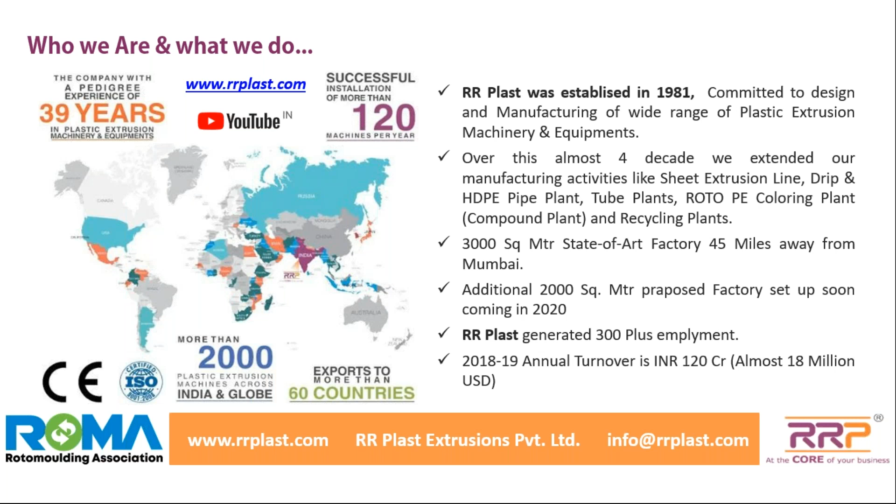We have clients across the world. Being it was a show for domestic market, we are not covering the international market. So this is a small introduction about my company.

Now, what is our today's agenda? I am taking you on a quality journey of rotomolding manufacturing. Now, most of the people which I can see are from the rotomolding industry, so they know the basic subject. But still, to start the subject, let us understand what is rotomolding.

Selection of a right granule of right MFI according to the application, making a right compound where you want to add additives, where you want to add colors, making it pulverize as much as fine as you can, and then from this powder you make a finished product from rotomolding, where you fill your powder into the mold, you heat the material while the mold is rotating, then you give sufficient time for cooling the product, and the product comes out from the tank mold. So this is a very basic process.

We are not going to touch the second and third process, which is pulverizing and the rotomolding unit. I am going to cover only this first part, which is related to extrusion.

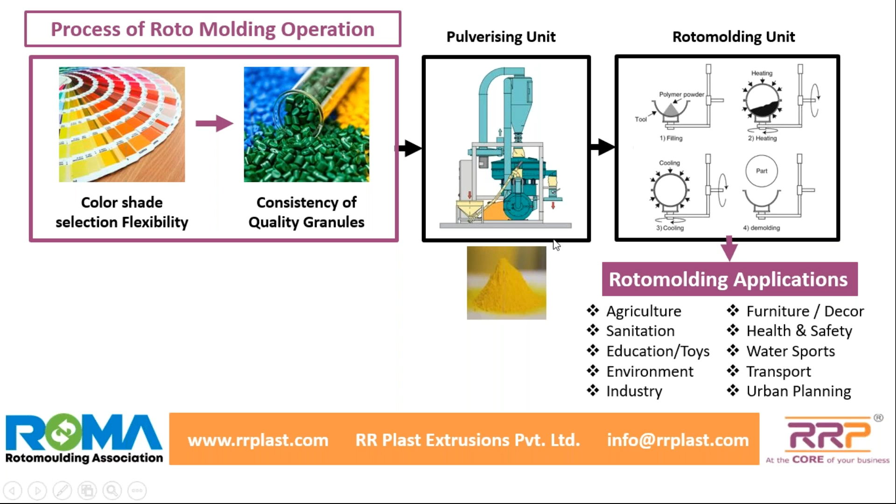Now, rotomolding industry is not just a tank manufacturer. They are evolving themselves to serve different sectors across the world for different applications, whether you say road barriers, playing toys, dustbins, chemical tanks, safety tanks, different applications, still more to come.

And I am sure most of the processors are looking for these technical products for their future expansions, where once you start thinking about these products, then you start thinking about the technical capability of processing the right polymer in the right way and molding it in the correct way.

See, some of our clients, I have taken this information from our clients only from India. See, we are not only a tank manufacturer. We are giving support to the railway industry for carrying materials, supporting our soldiers, farmers for the milk, safety for our family. So we are everywhere. Rotomolding is trying to give and serve to each and every industry.

So when we are trying to do this thing, we need to be very, very sure and accurate about what polymer we are selecting, how we are processing it. And that point I am going to cover in my presentation.

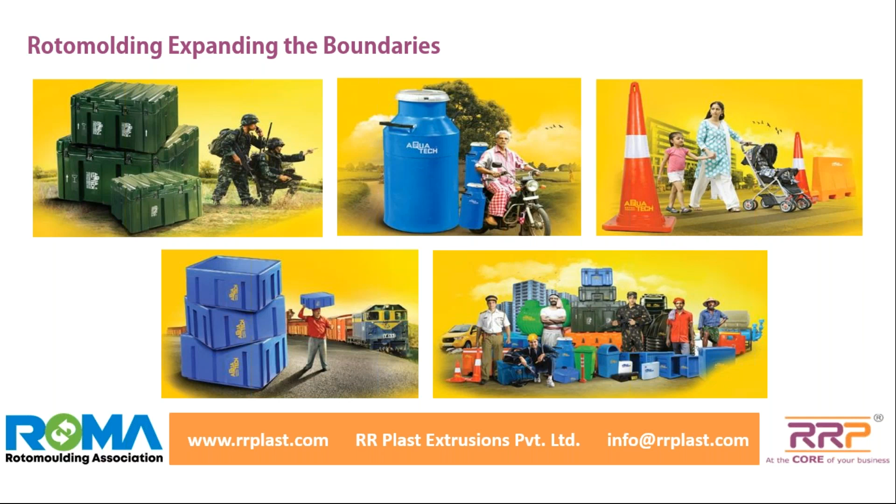Now, when we think about a roto compounding extrusion plant, what should a processor expect from this machine? He should ask the supplier, or ask himself, what does my industry require.

First question: higher dispersion of color pigment. Second: better melting of polymer without degradation and without changing the basic mechanical properties. Less exposure of material to heat. Homogenized polymer melting with the help of the right screw, which is the heart of the extrusion.

And the most important point: how much electricity or power I can save. Like countries in Africa, where most industries run on generators, or countries like India, where electricity cost is very high, this should definitely be a goal. Then, as the cost of production keeps increasing day by day, we must have machines with less manpower dependability. And last, consistent granule size.

Does the extruder or the compounding plant which you have deliver on all these points? I am trying to answer these questions during my presentation, so we can understand each and everything. Then I will come back to this slide to check whether the machine we are going to see is delivering all these points in terms of performance.

Now, before we go to the technical things, let me introduce the different models we are offering for this roto compounding. Generally, we have seen spaghetti, noodle, or strand pelletizing machines, which are generally available across the world and used by every processor.

During this process, there are some challenges faced by customers. We have come up with a new model, a die face cutting system, where you can see the complete layout I have shown you. I will explain the process in the next slide. This is the machine layout, and these are the models.

Now, where we are focusing, you can see in these charts, each and every model delivers output, whether it's a 45mm screw with 200 kilo output, or a 120mm screw with 1200 kilo output. The power consumption remains the same, which we commit to our customers: 0.18 kWh per kg, meaning unit per kg. This is always our goal when we design the machine and deliver the performance.

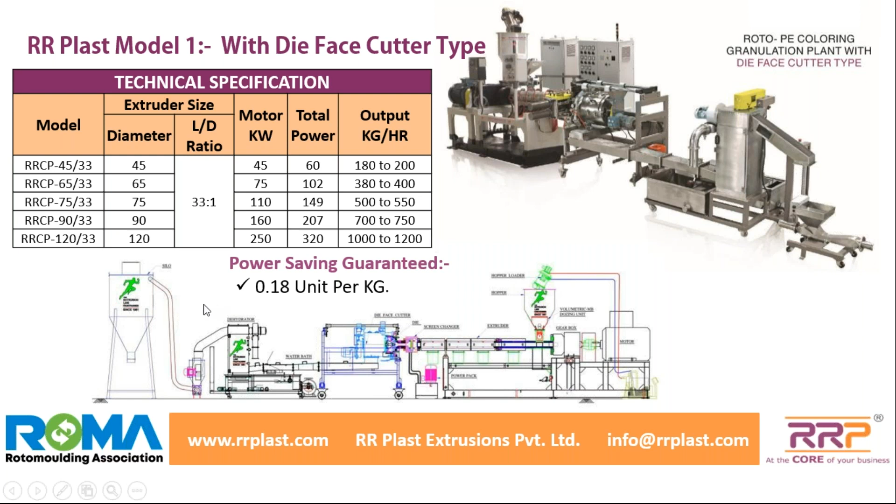Now I'll take you through a brief flow chart of this process. Let us understand how a general machine performs. Most extruders try to mix the material manually. You need a roto polymer, LLDPE, then you need color master batch, and sometimes additives to enhance the properties of the polymer, but these are physically mixed blends which go into the extruder. To this date, I see a lot of people depending on the manual process of this operation.

I'd like to draw attention to this point. Everybody should now consider whether they can use a right doser, a gravimetric system, which can take your virgin granule, color master batch, additive 1, additive 2, and dose very accurately into the extruder, so that each and every granule coming out from your extrusion line has the same properties, because it is correctly blended in correct proportion and percentage.

Those who cannot afford the gravimetric system, considering the investment cost, can at least go for the auto hopper loading system and volumetric master batch dosing, so you can be assured that during processing, your master batch dosing is not varying, so the dispersion of your master batch, or color, is absolutely consistent in each and every granule, so your product appears in the right manner when you represent it to the market.

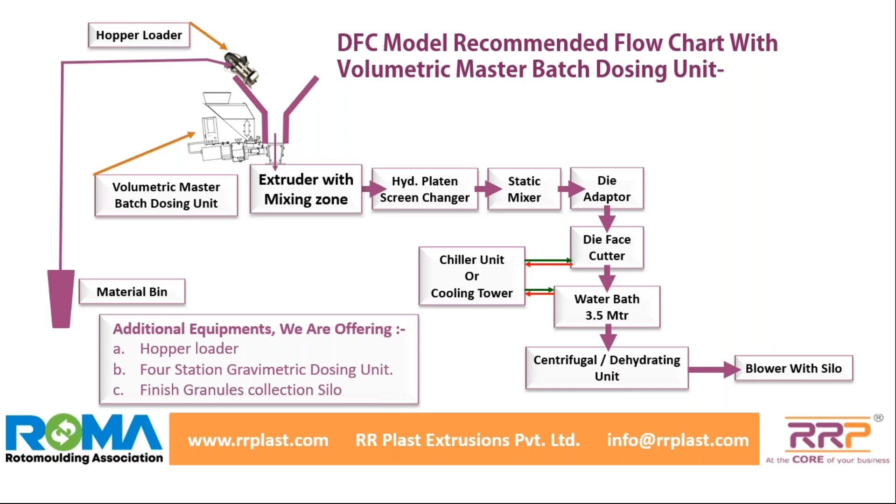Now, before we go to each and every segment of this flow chart - extruder, screen changer, static mixer, cutting systems - I would like to draw a little attention to a running video of our product.

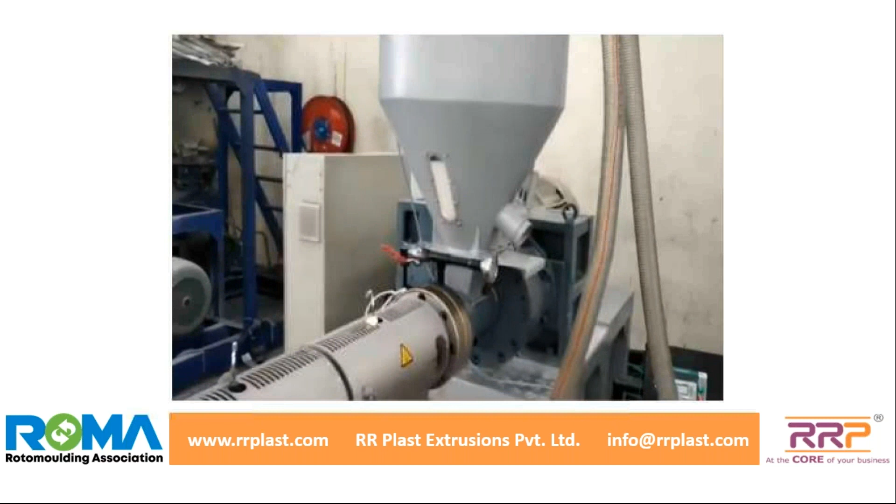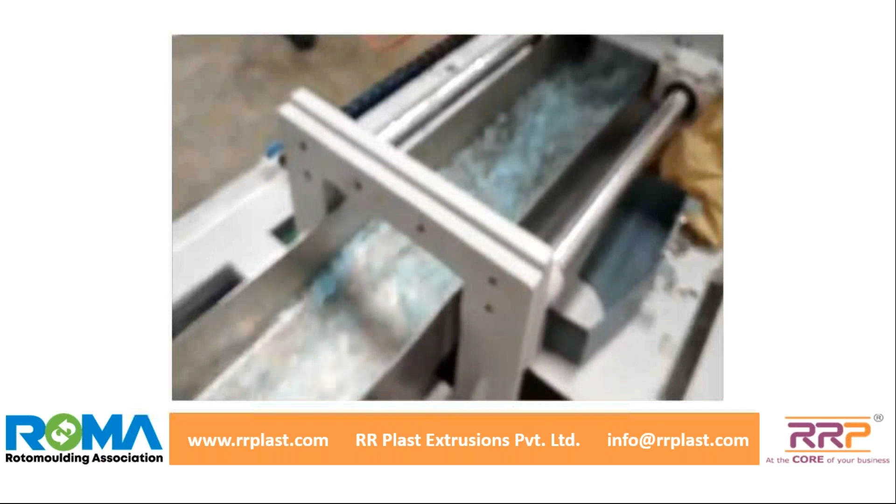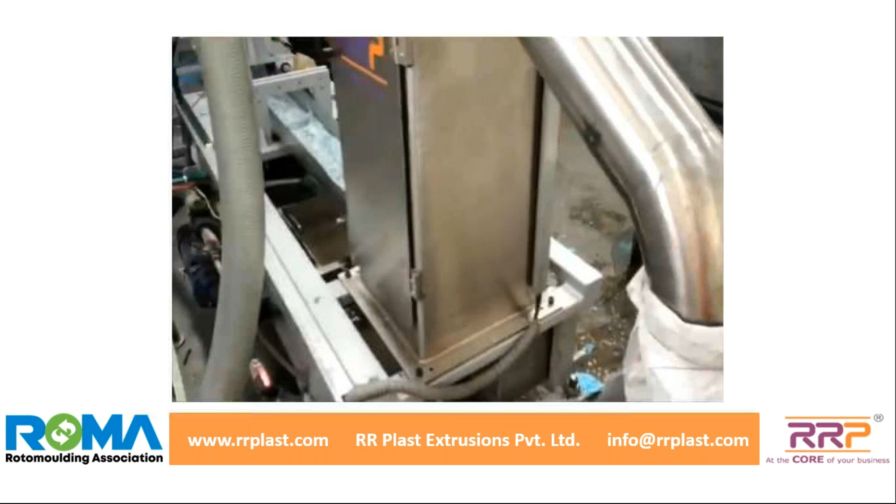See, this is the granule which is sucked by the loader. You can put a doser on the extruder, a die face cutting system. Now it has become a closed communication. The material is sucked by the loader and the granule is in your bag. Now this operation becomes a complete closed loop operation - no human being touches it, less area consumed. The die face cutter system we will discuss later on in more detail.

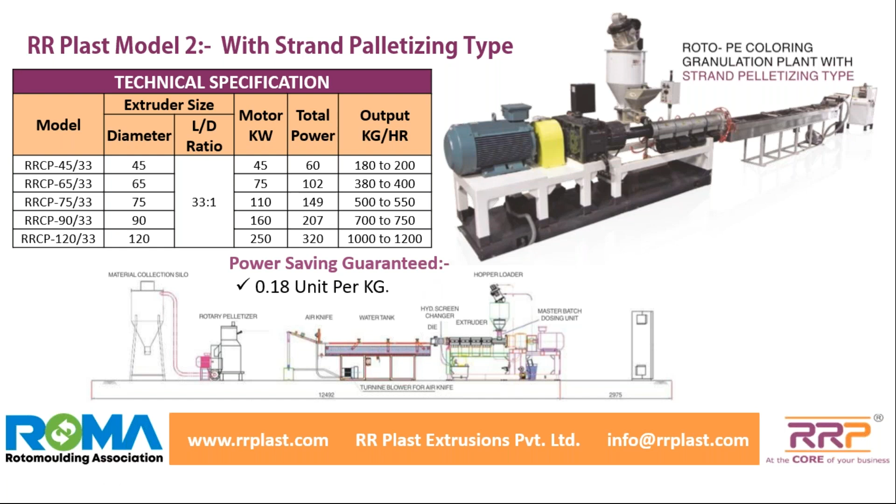I'll take a small video of this strand pelletizing. Okay sorry, before that, we will go to the process.

Same thing - you can have a proper mixing element, whether it's a gravimetric or volumetric doser, or hopper loader. After correct mixing, it will pass through the extruder, filtration through the screen changer, static mixer for better melting, multi-strand die, water tank, air knife, rotary pelletizing, and collection of the material.

So this is a complete setup. To run this machine, you need water, which can come from a cooling tower or chilling plant, depending on the capacity of the machine and the atmospheric temperature where we are going to run this machine.

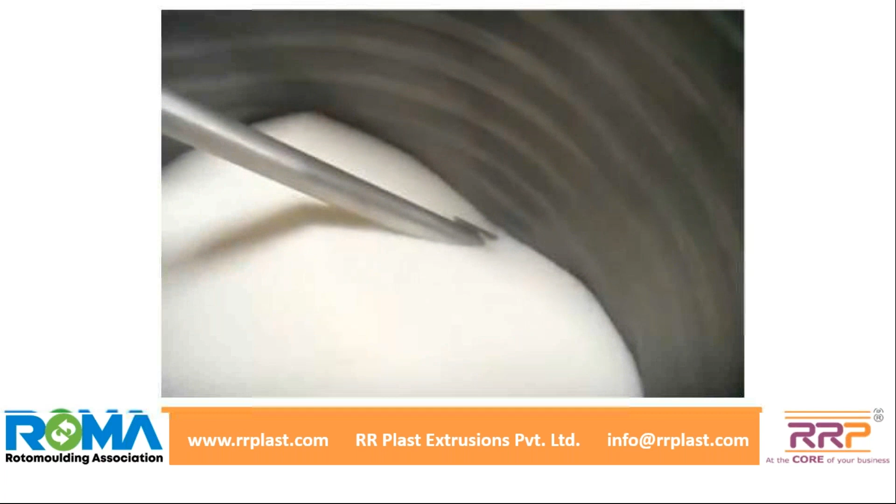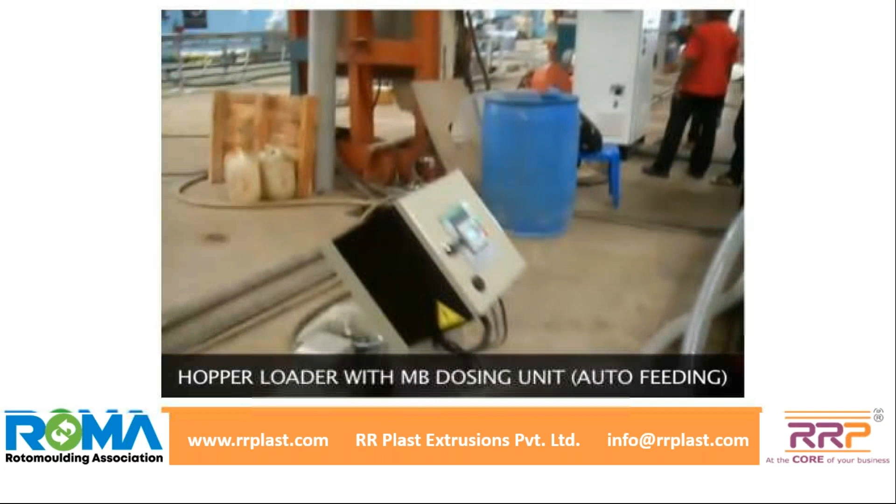This is another small video. These are the videos taken on our shop floor while doing the trial testing of the machines. We do a practical trial at rated capacity for multiple hours in our factory itself.

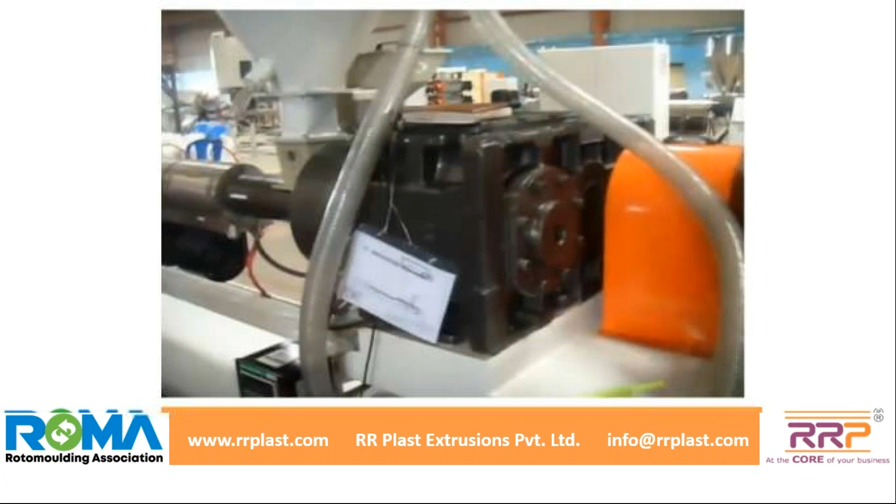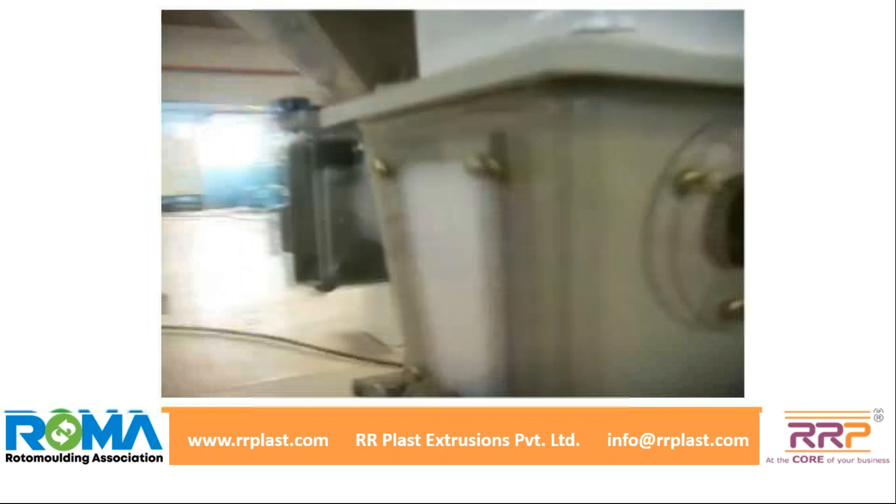You can see the direct couple motor to reduce friction between the belts, better energy transmission, volumetric doser for master batch - you can set it on the HMI, a barrier groove feed screw design. This is the doser which is dosing the master batch into the polymer.

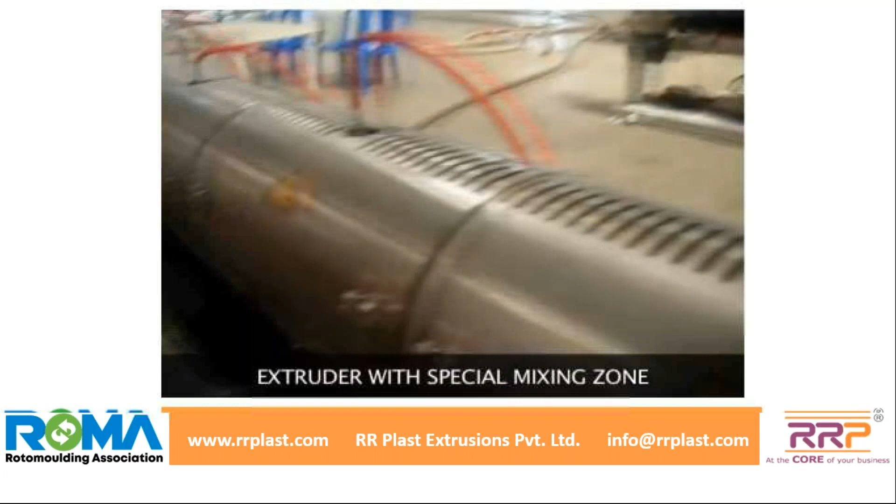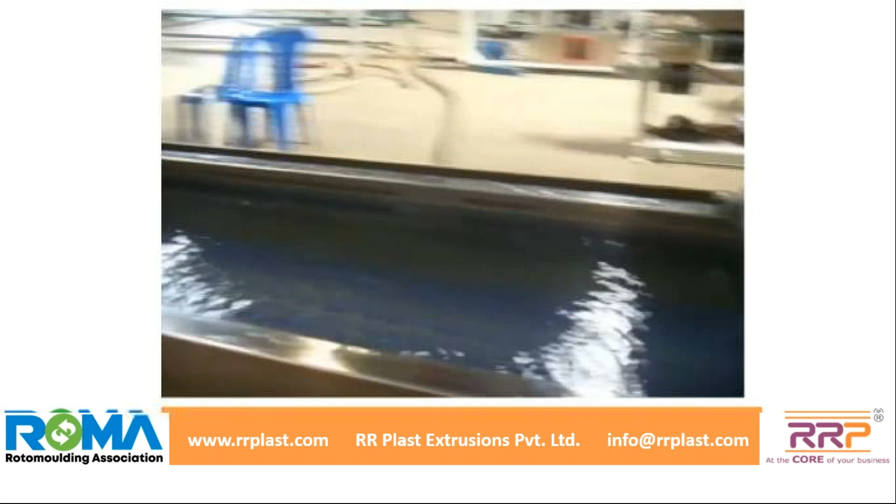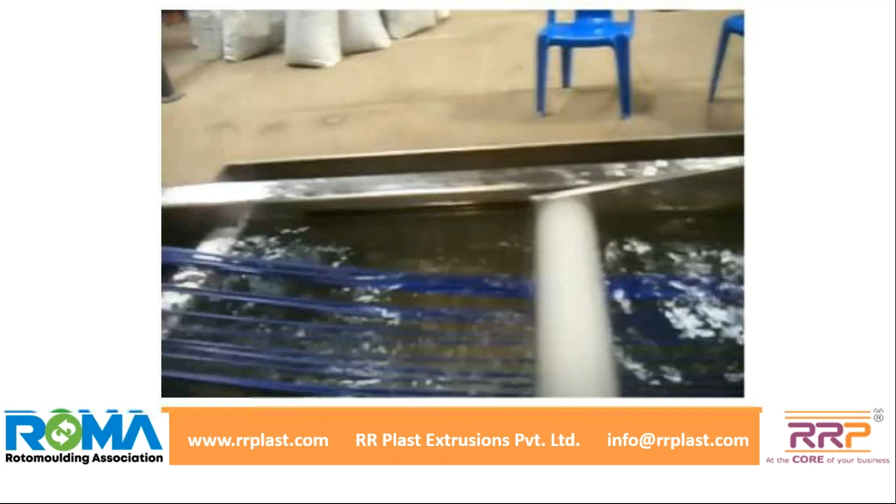Extruder, strand die, or you can say spaghetti die, cooling water bath, air knife to remove the additional water from the strands, and the strand pelletizer.

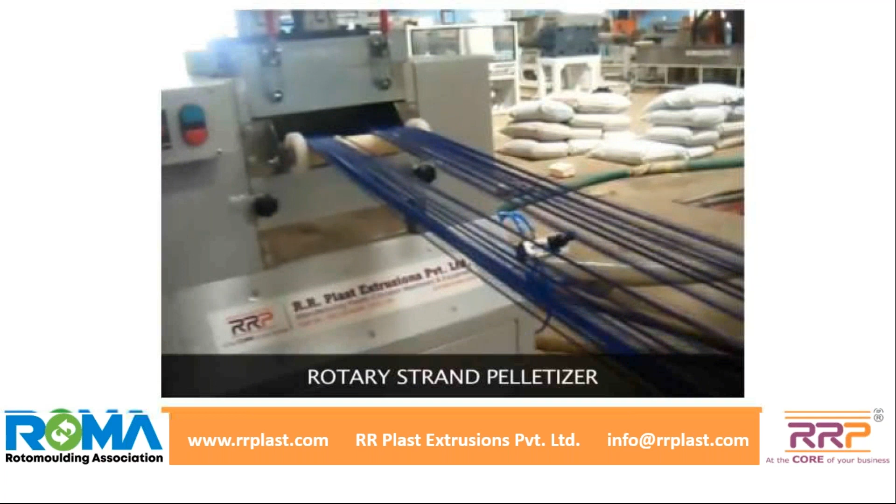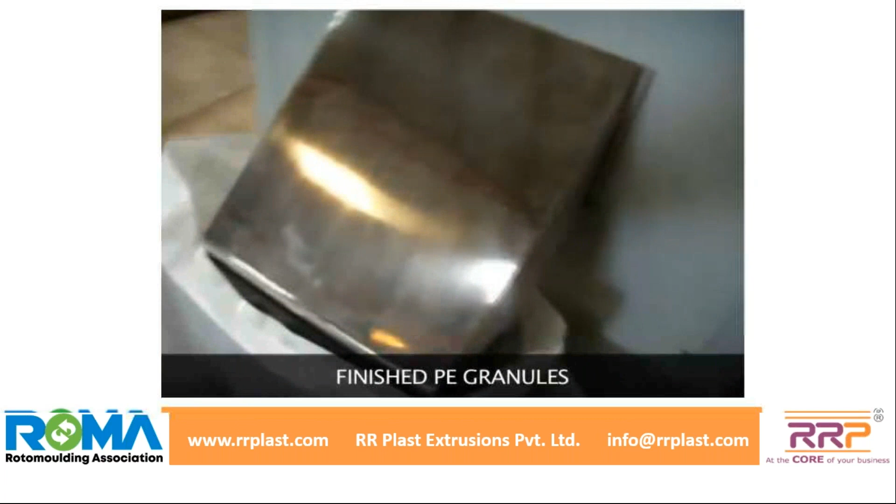So the flowchart we have seen, we have tried to cover in this machine. Maybe not all the components are available on the machine - this depends on the choice of the customer.

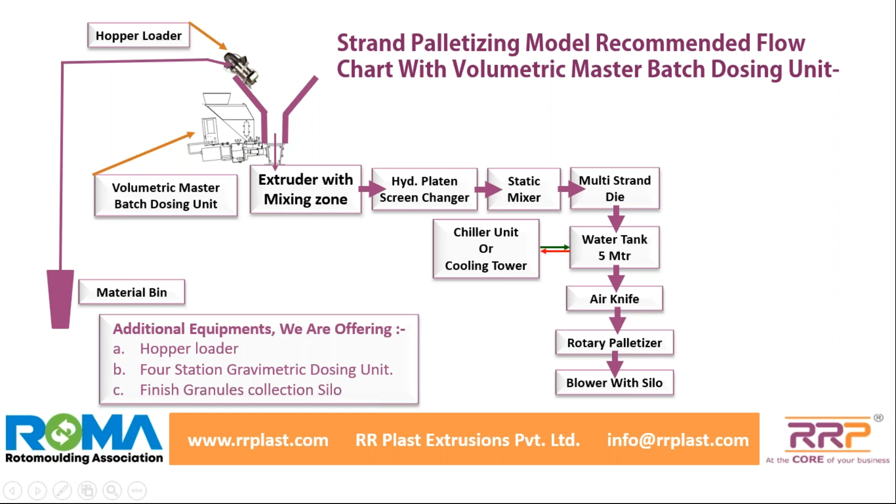Next, okay. Now, when we discuss the complete extrusion line, let us start with the first thing - the raw material and mixing with the right additives and polymer. What components can we use in this?

First, let us start - we don't depend on manpower. Anybody can select a hopper loader, which is available in your factory, or you can ask the machine supplier. So the loading becomes a constant feeding to the extruder.

Then the basic element one can select is the volumetric master batch doser. Why do you need this doser? Economical feeding of colors and additives. Precise metering reduces the color cost. This is a very important factor.

Say I want to add 5% of the color master batch, and while doing physical mixing manually, if a person does 4% or 6% instead, it will deteriorate the quality of the granule, as well as impact your manufacturing cost. Digital set point accuracy lets you set the product very accurately, reducing manpower - you don't require manpower to control this mixing. There's less material spillage because the system becomes automatic, and the perfect mixing ratio gives you color shade and quality consistency.

Now this is a very important part when we think about the tank and the product which is going to be used on external applications, where they are going to be exposed to UV sun rays. If your color dispersion is better, if your dosing of the master batch is perfect, then each and every product made on the roto molding has a consistent quality in terms of color shade, and your product life will get enhanced properly, as well as the appearance of the product always looks the same. Whether you have 50 products in your stacking, you can see the same product by use of this system.

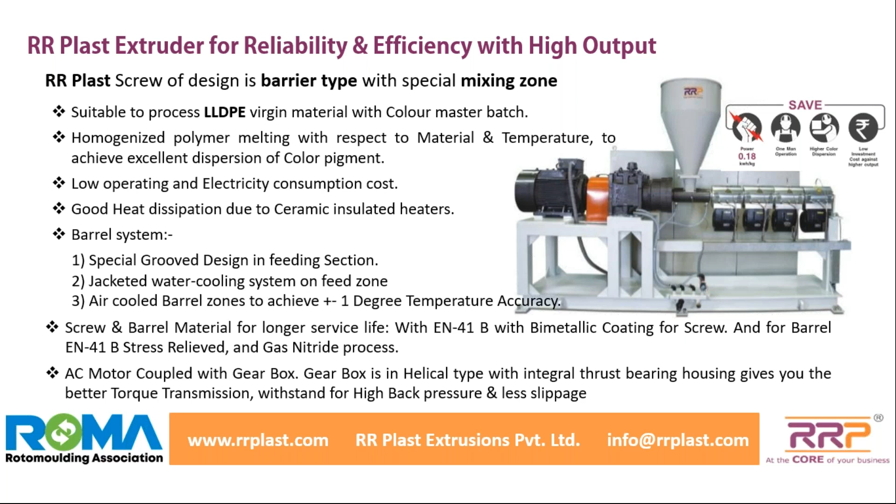If you can see this, the AC motor is directly coupled with the gearbox. For this particular model, we are specially offering this technology so that we try to reduce the transmission losses of using pulleys and belts, so that power consumption becomes low and machine maintenance becomes very low.

Now, when I was talking about different slides, everywhere I used the words low power consumption, better melting, homogenizing, and higher dispersion. Till now I just talked about these words. I did not explain how we can achieve it, how one can achieve it.

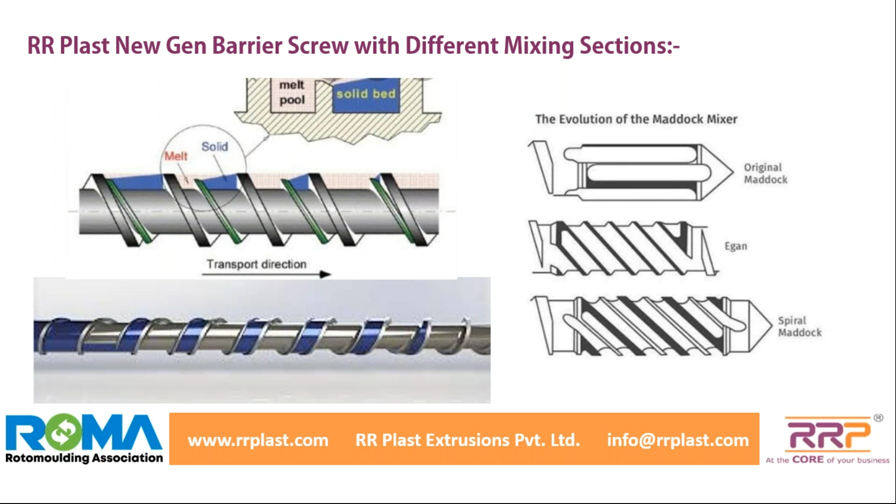Now, before we reach 100% melting, there is another element coming after the extruder, which is the screen changer.

A lot of people ask me the question: sir, I'm going to use virgin LLDPE, which is about 4.5 MFI, and I'm going to add only master batch or additives. So why do I require filtration?

You require filtration. First of all, every single screw by default has a breaker plate, and the screen changer also has a breaker plate. What is the use of a breaker plate? The breaker plate will first break the laminar flow of your material which is coming from the screw, because the screw is rotating, and the material coming from the screw is already in laminar flow, which gets broken in the screen changer.

Second thing, because of the breaker plate, you are using some mesh like 40, 60, or 80 mesh, creating a back pressure. This helps push the material at a constant pressure into the die, so that the strands coming from the die have constant pressure and constant size.

Now, even a person using virgin material and a master batch, after certain hours of operation—say 24, 48, or 72 hours—some degradation is going to happen, because of the colors in the master batch, maybe unmelted polymer coming with the virgin granules, or maybe some physical contamination during handling of the raw material. All these points get checked and filtered in the screen changer.

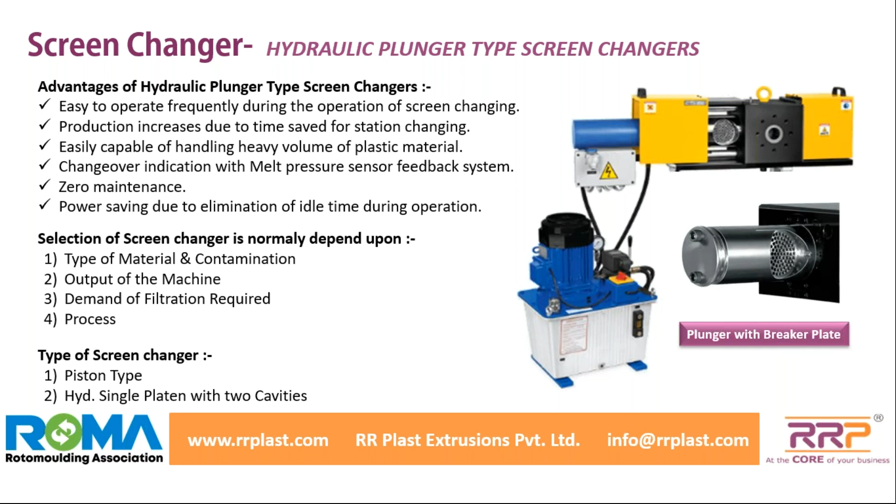Now, during my extruder explanation, I tried to explain that your screw is going to melt around 95%, then further is going to be taken care of by the mixing element into the screw. Still, I have not achieved 100% melting. One can say I am at 98%, 97% of the melting. Now, this is the additional equipment which we have started offering to our customers. This is called a static mixer.

So what is happening with this mixing element? The material is tumbling up, down, reverse, forward, and then pushing ahead. So during this operation, what is going to happen with your polymer, which has a pigment? Outstanding mixing performance. Minimum pressure drop, very important criteria. If you have less pressure drop into your die, your strand size is going to be consistent. This element is extremely strong and unbreakable in design.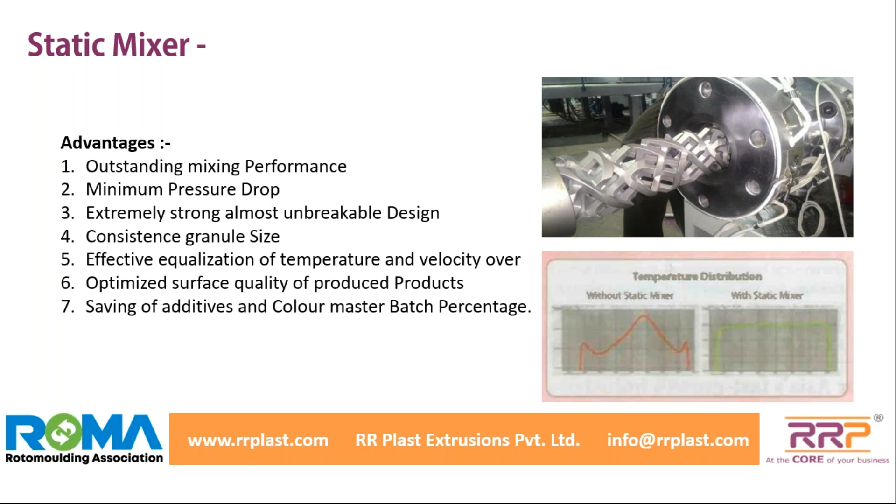Now we have finished our melting section, where we have mixed the material and melted it. We have seen how correctly it has gotten melted. After the static mixer, I am sure now the material is 100% melted. Also, it has gotten filtered in the screen changer. Now it has come to the finish stage, where I have two options.

One is die face cutting, the other is strand pelletizing. So now the melted material will enter the die, and this post equipment will change. In both options, before the die, the components remain the same. In die face cutting, the system will change; in strand pelletizing, the system will change. Only this is the difference between both the models.

Now, what are the advantages of the die face cutter? The most important in the current situation — less space. A lot of people face problems with space in their existing factory. This will definitely save a lot of space by not using a water tank and strand pelletizer. So I can say that's a small footprint.

Because of closed loop operation, production increases, and granule size is consistent — you are not depending on manpower or the strand pelletizer. During strand pelletizing operation, some wastage gets generated because the operator has to take the noodles or spaghetti from the die and feed them into the strand pelletizer. That can be minimized with this system. Lower power consumption compared to the strand pelletizer, and easy to maintain.

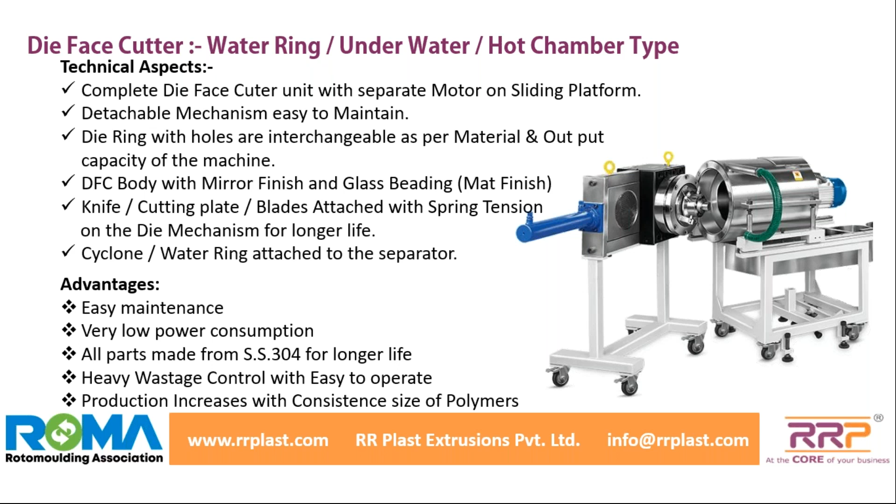All these parts are in SS304, so I will not cover that technical point — that will become part of the technical discussion or quotation. So this is the first system.

Second is the strand pelletizer. One can see we are offering a rotary pelletizer, not a blade pelletizer. Even this system is being used by a lot of my customers — they've used it for years and years. Granule size is also consistent. But as times change, one can definitely think about the die face cutting system.

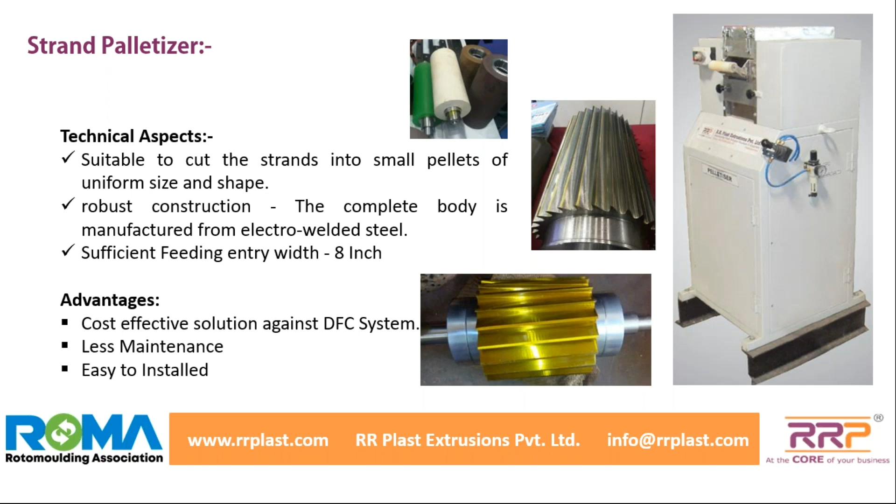Now, whatever we discussed today about roto compounding was all covered about the virgin polymer, which is called roto grade. The MFI will be about 4.5, additives and master batch. In the whole discussion, I did not talk about recycling, foaming, or using recycling material into the system, because the machine which I explained to you is not suitable for recycling the roto waste or foaming waste, since that machine is purely designed for virgin granules.

That machine is not for the recycling product. But as we know, there is a parallel industry in roto molding which makes finished products with recycling material or a combination of recycling material like LLDPE film waste, roto waste, and LLDPE virgin. This is also a big industry, at least in India, where they are trying to make this mixing.

For this product, I have a different solution. The machine which I have shown you is not suitable for this industry. But this industry also needs a solution, and I have a different solution for it.

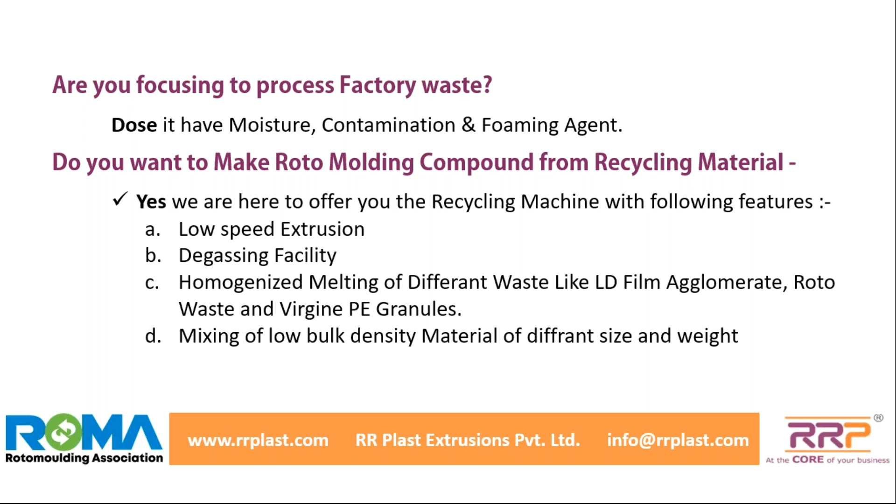All these things are possible to achieve with this degassing extruder. The rest of the system remains the same, whether you are doing strand pelletizing, die face cutting, or mixing material by hand or auto section—all those sections remain the same. Only the extruder is replaced. This is the different solution for your requirement.

So when we talk about the rotomolding industry, one must explain your requirement, your raw material properties, what you want to mix, to the machine manufacturer, so that he can suggest the right solution accordingly. So we are ready with both options for all our clients.

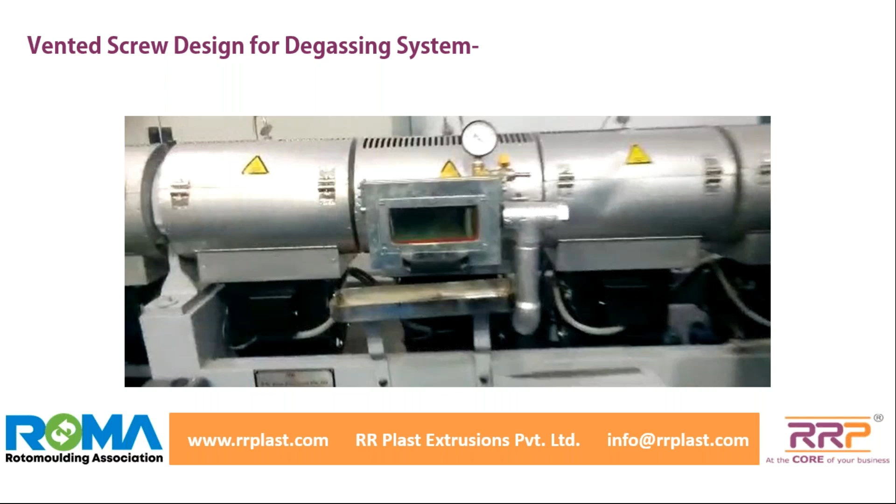Now, another challenge during this COVID period. Till date, whatever machines we have supplied—whether in export markets like South Africa, Kenya, Saudi Arabia, or the Indian market—to all the big players, because of simple operation, people have unfortunately not gone for PLC touchscreen operations in these machines. We have also not pressured customers to buy this system. While all our other machines, like drip irrigation or sheet extrusion lines, have a dedicated industrial PC, these are the need of the time.

But the last 3 months, this COVID has taught us why these systems are important for the future. Once such situations occur, with PLC systems or Industry 4.0 smart machines, we can access your machine from my factory—whether you are in South Africa, USA, or India, any part—I can access your whole machine from my factory. I can diagnose the problem, I can solve the problem, I can guide you on how to solve the problem wherever you are in your factory, and I am your brain working behind you. This will be a need of the time which we are going to emphasize to all our clients in our future machines.

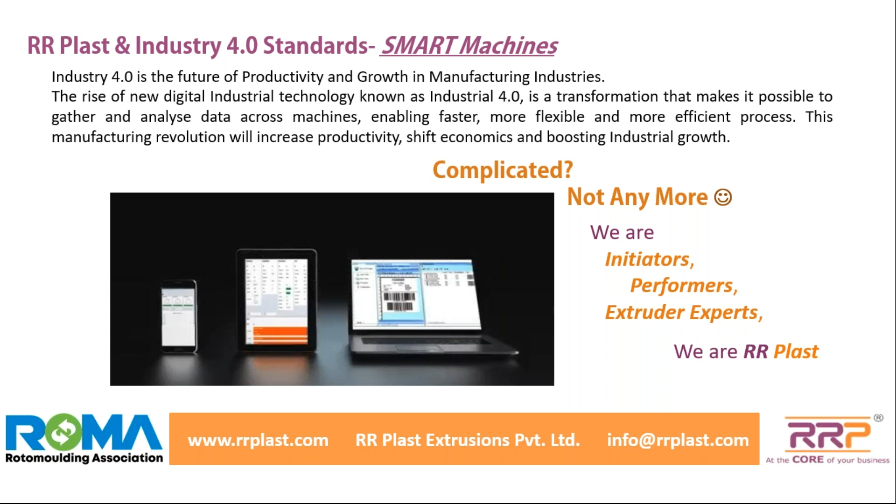Why are these systems important? During COVID-19, when we started our factory on 1st May, machines were lying on the shop floor, ready for dispatch. Neither the Indian customer nor an outside client was going to visit us. So how to approve the machines, how to dispatch them? Those machines that had reached different countries or different parts of India—how to get them running? This was a big challenge.

Till March, nobody had thought about this subject because it was never needed. We were always there for our customers; whenever they needed us, we were ready to support and help them. We had a team to support them. But in the month of April, we understood that even with a big team and all the instruments, we still could not support our customers. So we started working on different solutions.

On 9th May, we gave a live demonstration to our Mexican client for a recycling machine. One of our persons in Mexico, our technical team, and the client spent 2 to 3 hours running the machine. They observed the machine through the camera, asked questions, wanted to see different parts in close view, and asked us to stop and restart the operation. All this was done, and on that basis, they approved the machine for dispatch. This was a new subject for the industry.

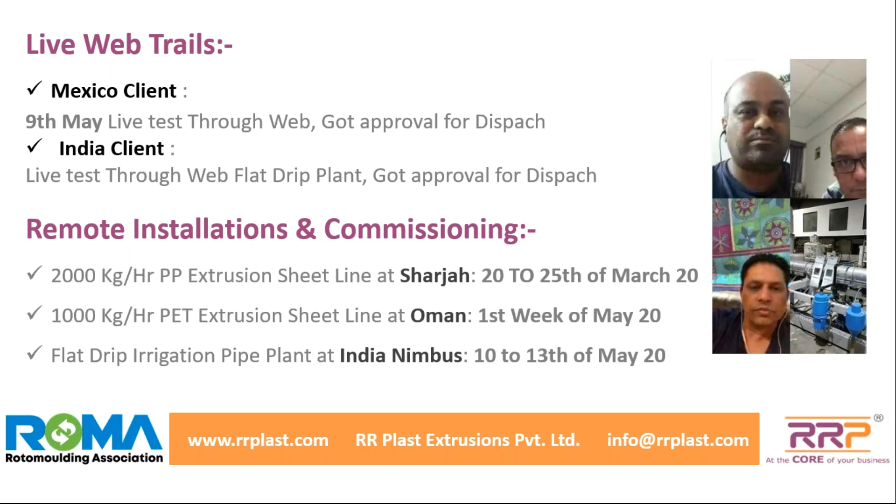So we are available with the solutions for all my clients. These are the small pictures. Even in India, if my people are visiting, they are taking care, guiding the engineers, taking the safety measures, and still they are working there.

Because end of the day, the slogan is, show must go on. You cannot stop. You cannot hold the economy. You cannot stop working. We have to live with this situation now. We cannot avoid it, but we should not also get afraid of it.

Since 1st June, my whole team is consistently working in the factory with all the safety norms. More than 100 people are attending the factory. My director, myself, everybody, every day is available in the factory to support the customers, their requirements, and dispatching the machines.

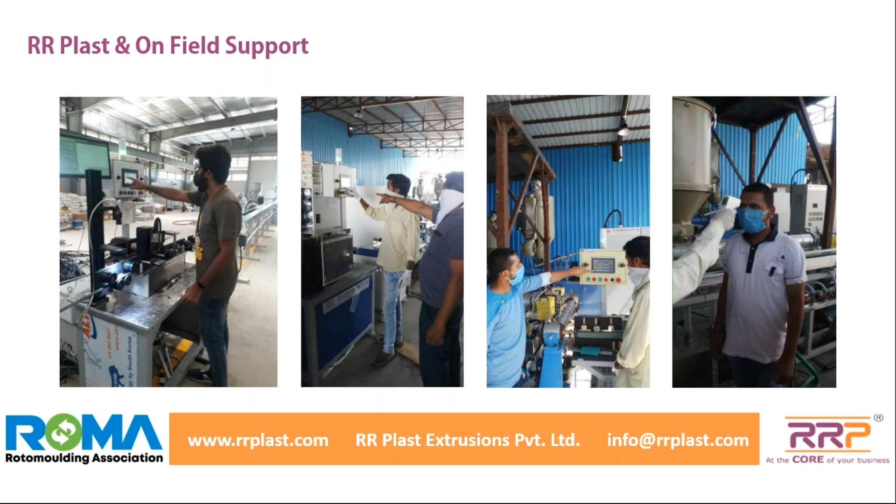Although this is not the subject of the rotomolding industry, some of the members asked me to take a small note on this point. In the month of April, we designed a new machine called a melt blown non-woven fabric production line. This is the fabric used in masks. If you see a 3-ply mask or any N95 mask, it has an internal layer called melt blown fabric.

In the month of April, this material was not available in India in sufficient quantity. Very few companies, like 5 or 6 companies, were producing this fabric in India for this application. So considering the need of the time, our director, Mr. Jagdish Kamble, and our team thought to develop this machine.

But developing through R&D and making it possible always requires a cycle, a time phase. Here it was a challenge. It had to be done in a short period, because if I develop an excellent product and it gets delivered after 6 months, there's no use in the current situation. On 15th April, we had the thought in mind to design this machine.

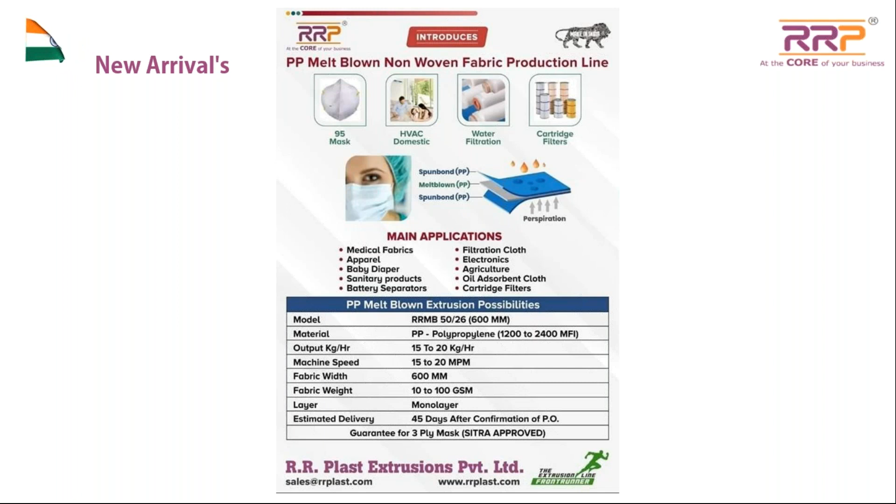Also, we have good representation in Saudi Arabia, South Africa, all the African countries, and Latin America for these machineries.

I'd like to thank Roma for giving me this opportunity. I have tried to cover a lot of points, but before making the end of my presentation, I'd like to go back to the slide where we asked certain questions. I think Bhushan ji will have the question and answer session after this.

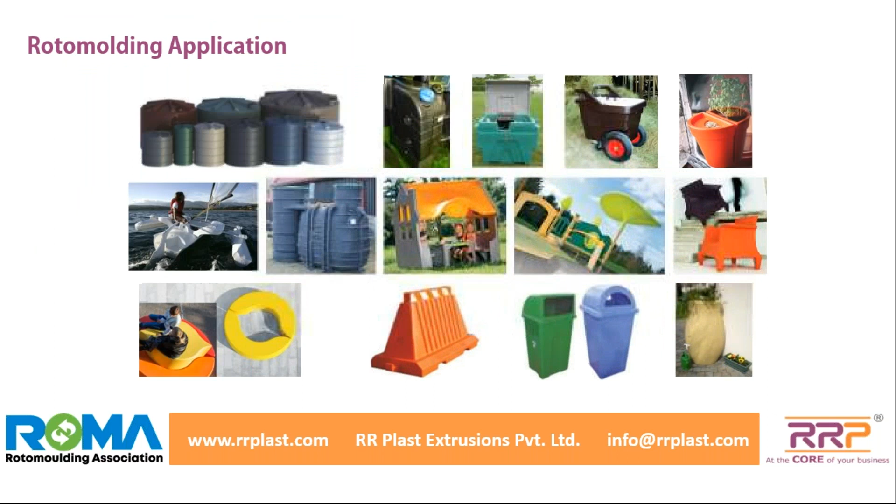Yeah, no, just before that, I want to make sure I've covered these points. The strategy, actually, this question is a part of the presentation. So let's finish, Bhushan ji. Just a minute, sir. Bhushan ji, yes, sir. Yeah, I'm coming, sir.

When I started my technical presentation, we went through the slide with the slogan: what one should expect from a roto compounding plant. The first question was about higher dispersion of color pigment. Yes, by selecting the right screw, right mixing segment, and using the static mixer, one can definitely achieve this with my machine.

Better melting of polymer without degradation of polymer - yes, my screw designs are designed in such a way that you will not get degradation in your polymer. I have given you one example: you can take a virgin granule of LLDPE, put it into my machine, make the granule, and check the properties of both materials. We are quite sure you will be very close in all properties. Less exposure of material - yes, because I am offering you high speed extrusion.

Homogenized polymer melting - yes, I explained the barrier screw and its use. Low electricity consumption - yes, I've shown you that all my models, whether you select 200 kilo or 1200 kilo, we guarantee on my brochure and catalog 0.18 kWh per kg will be your consumption power.

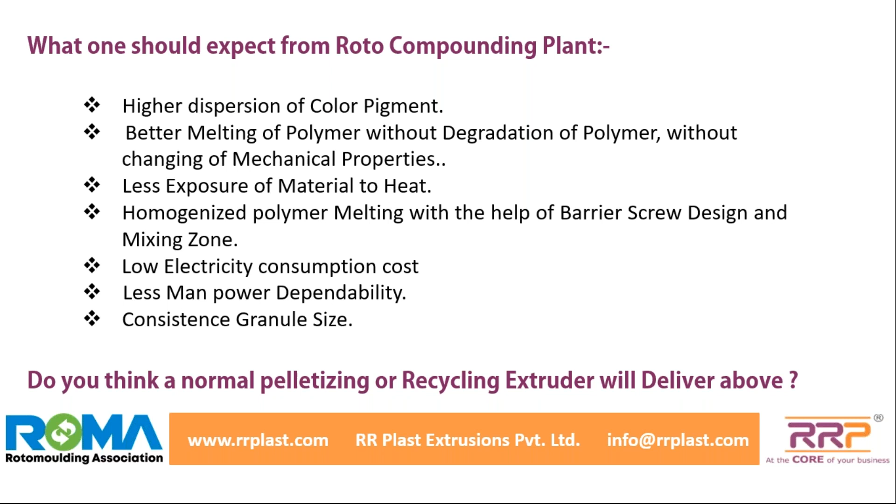By doing automation, you can reduce manpower dependability, and by using the die face cutter or better design of pelletizer, you can get a consistent granule size. These are properties one can expect from a compound delivered from my machine.

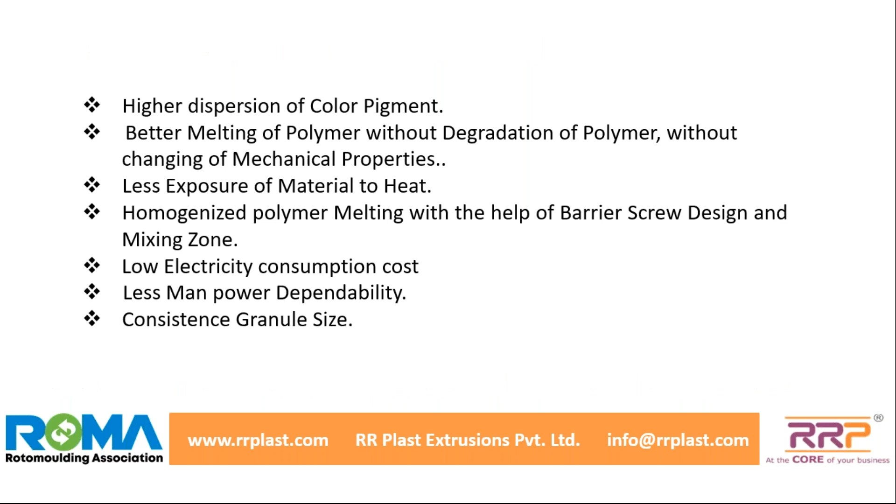Do you think that a normal pelletizing or recycling extruder used in general industry is going to deliver you this? No, not possible. So these are all the points I tried to explain. If there are any questions regarding this, they are welcome.